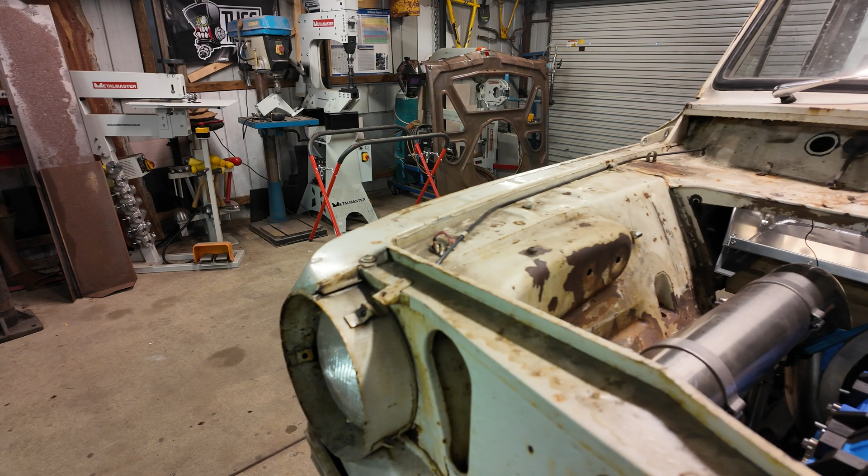That's a hell of a unit. It's also got a 20B, this is a mock-up motor as well guys. It's got a 20B triple rotor being built for it, with what I can only assume is one hell of a hairdryer for it.

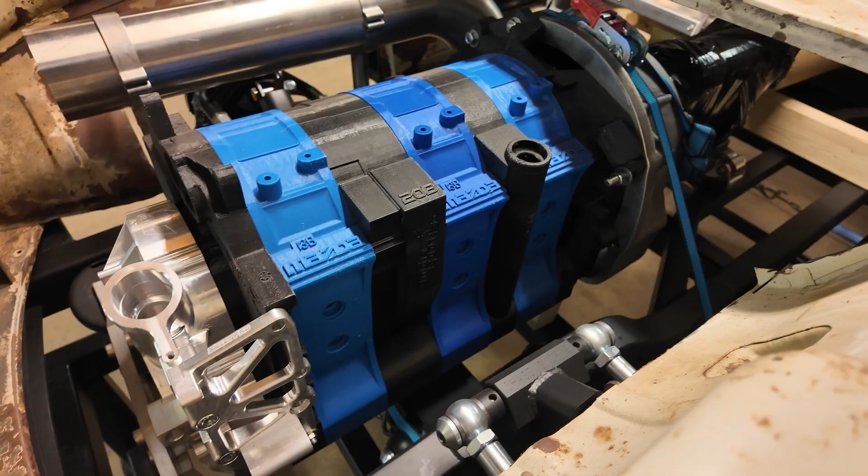But the motor is not quite what we're worrying about at the moment. So we've got our original floor profile roughly, we know roughly where the seat is. Stacey has mocked everything up and got everything in position for the driveline. The only thing we don't have is a steering column, but we're not going to worry about that in this episode. He's still going to mount the rack and a few other bits and pieces before we get to doing that.

So my brain thought initially, I need to create structures and profiles that are rigid and strong, knowing that I need to mount a seat to it. I need it to be self-supporting because I don't want to have it sag and sit on the rails. So what I actually did the other day, it's been bucketing rain here in Canberra, it's the first time it's not rained in a few days.

I actually made up a profile of roughly what this main seat area is going to be. It's very, very basic, it's just a 50mm strip with a couple of folds in it. It gives me the rough layout of where I want everything to be in terms of the main flat sheet profile. What we're going to do now, that I know this size is right, I know roughly how big I need the landing for the seat.

We're going to make it in ram board, we're going to make a cardboard floor first. So we're going to fold it up, cut it to size, draw out all our patterns on it, which should mean we can mirror image our floor.

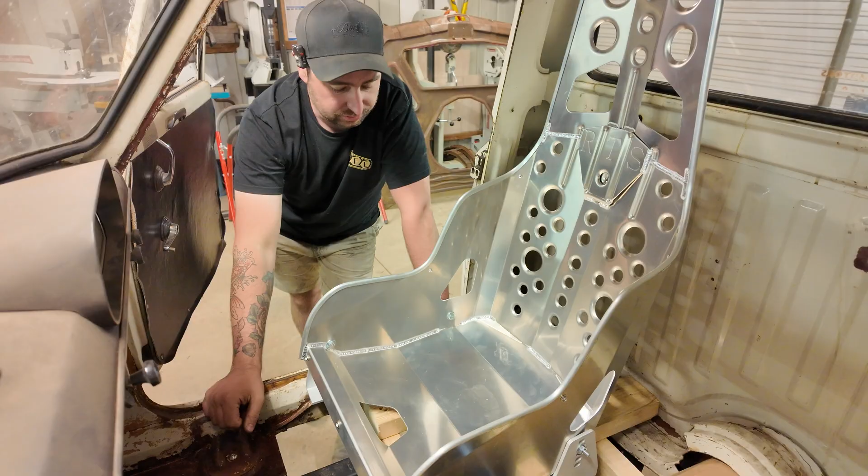What I want to show you before we really kick off: this seat needs to be in this position. It needs to be as close to the pillar as possible, and it needs to have that space behind it for a tube to run through.

What I actually did the other night in the rain was make up this sample profile of how I want the floor to look, knowing that I want the bucket seat to be right there. So I know it needs to be 45mm from the sill over and about 50mm behind, just in case.

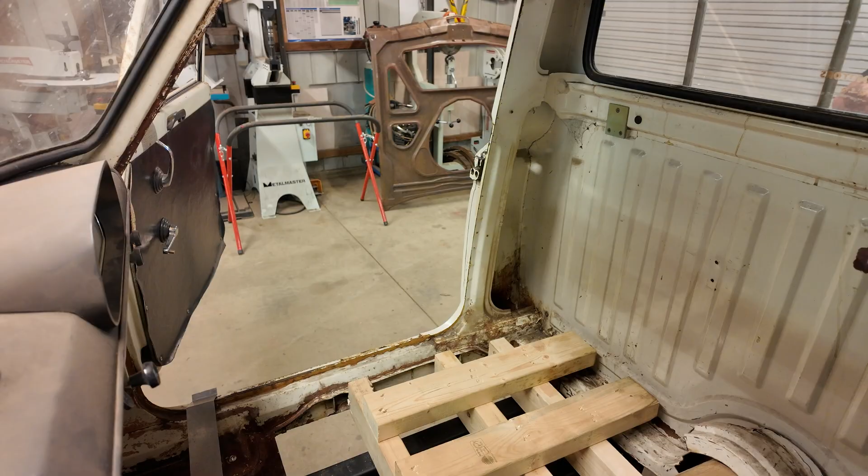So I'm going to pull this out, and the timber comes out just like that. Remember how I was talking about that original floor profile here?

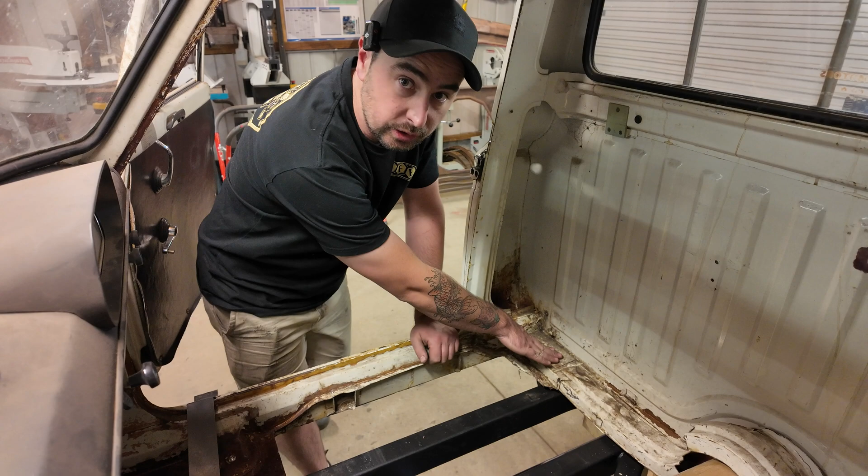Knowing that there's a body mount there and a body mount here, this piece is actually directional. So this is the back, this is the front.

So when it sits in on this floor, it lands where the original body mount floor is, and it lands where this rear top hat originally was. That rear top hat's going to get remade except for where the mounts are, so there'll be a new piece left to right. It'll change across the back of the cab as well.

But this sets the height I need for the floor. It also sets the height for the seat, because the seat actually had to come up just a hair, but that's all good. So with that profile known, I know my cut sizes.

I actually wrote it all down on a piece of paper somewhere. I'm hoping I didn't just throw it away when I tidied up a little, but I know what all this needs to be. These are all 45, so it's fairly simple.

What I'm going to show you now is I'm going to cut the blank in the ram board. I'm going to fold it up so I know roughly the shapes. I then know what this area is, and I can sketch out my design. I can mark out all my patterns on it, and then I can take that pattern and transfer it to my plywood for my hammer form for this area.

So let's actually get the ram board out now, and I'll show you exactly my math behind this. So this is what I've got so far. Normally you'd have footage of me measuring this out and writing all my notes down as well, but because I've already sort of technically done this for the sample, you don't need to see that bit.

So what I did was roughly put the seat in position. I knew how far away it was from the door pinch, and how far away it had to be from the back of the cab, which is good.

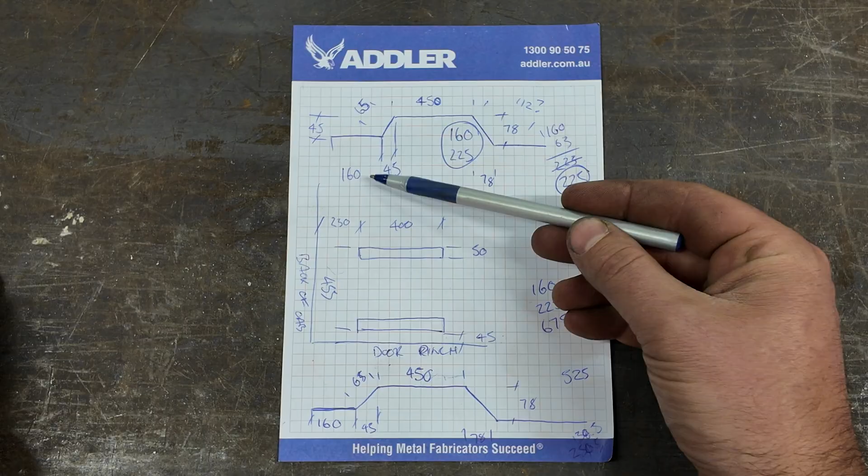It then gave me these sizes, so 160. I know the foot on it is 400 by 50, so I know if I make that landing 450, I should be laughing. Everything should fit.

These seats don't have runners, so they don't slide. They're just bolted and fixed in position. So knowing that, I knew where I needed to set those out.

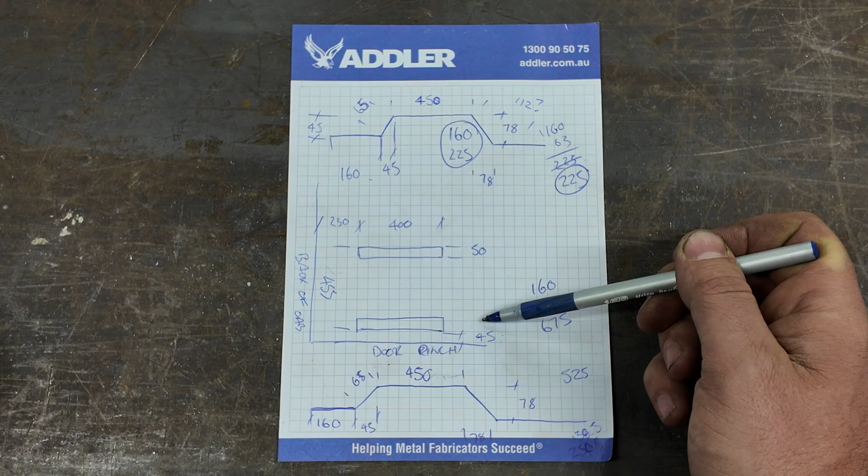I knew the overall spacing of the mounts, which then gave me roughly a position along the sill where I needed to be. I knew roughly how far I wanted that to be. And then obviously there's the footwell, the floor panel section there.

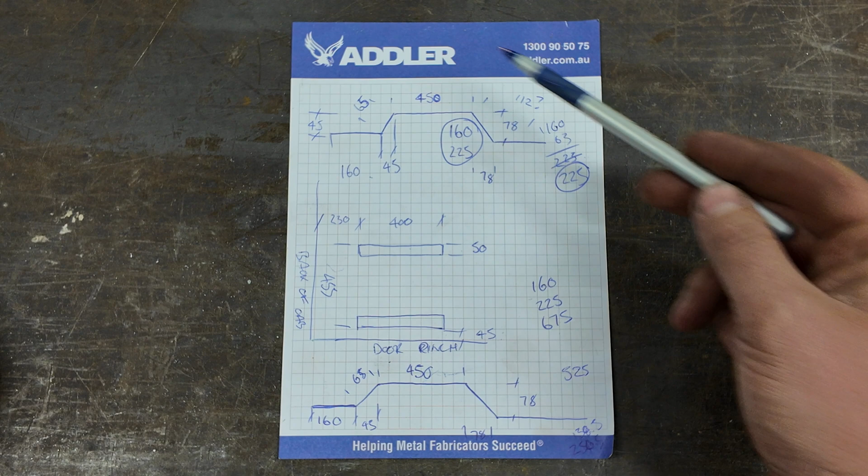Knowing all these dimensions, I then created my fold pattern, which is what's drawn up here, which is where I've got that 160 from and the 225. That 160 is that first fold, 225 is the second fold.

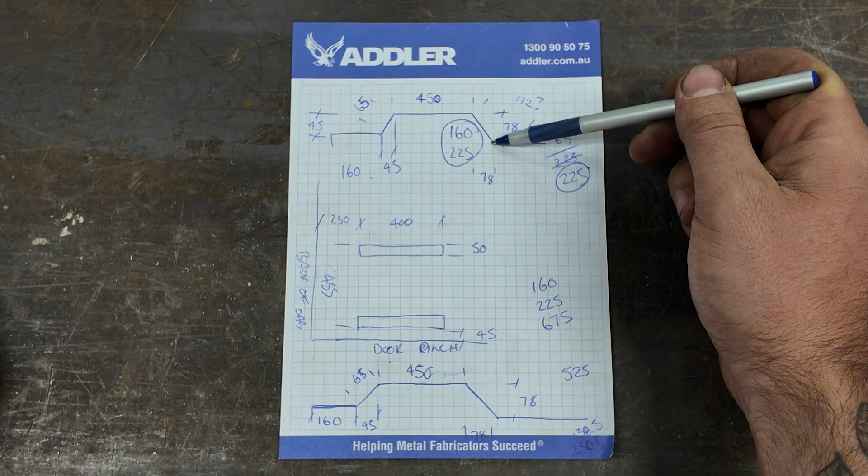I then mark on 450, gives me a point for that one, and then I add 110, not 112, gives me a point for that one, and that's just the overhang of the sheet from there.

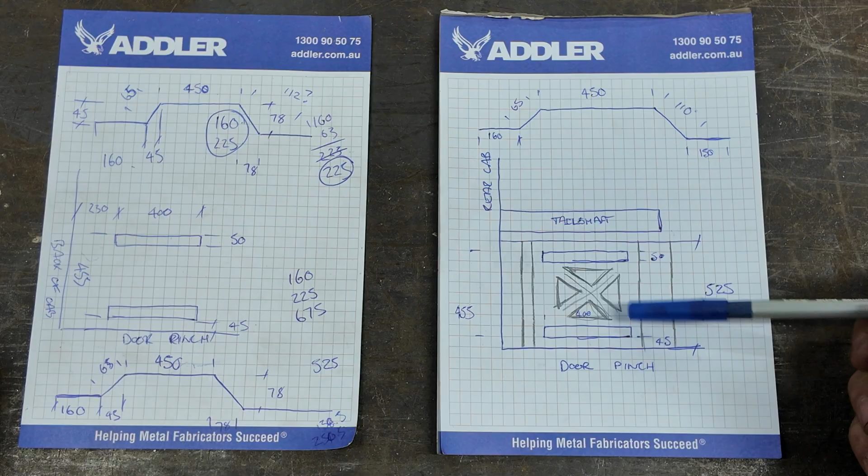Knowing all that, I was able to create my template. What I do after that is a more legitimate plan, so I know exactly where my seat mounts are going to be, what shape I'm doing on the floor. I'll do a bead here later, but that's right on the edge of the sheet so I'm not too concerned about it. I also know where this flat is going to join to the floor footwell piece, added later on.

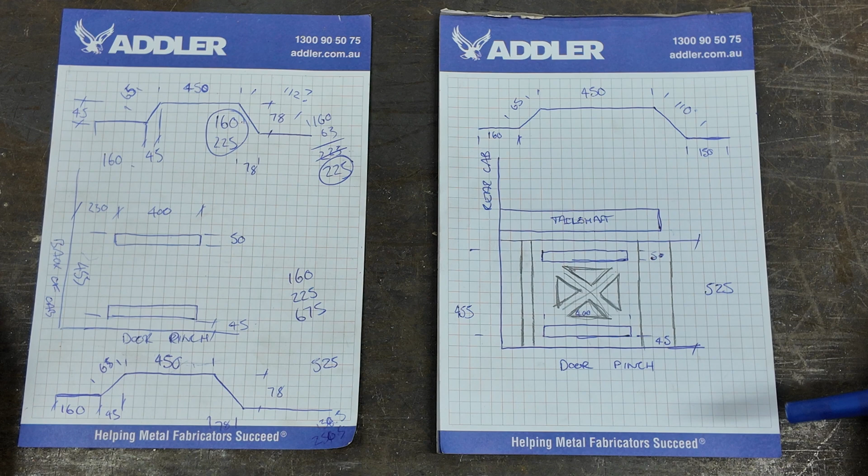I also know I need to make a 2mm or 3mm top hat, which will roughly sit about there, and underneath there'll be an actual triangulated gusset. Those will land and pick up my seat mounts, and the top hat will run through this area.

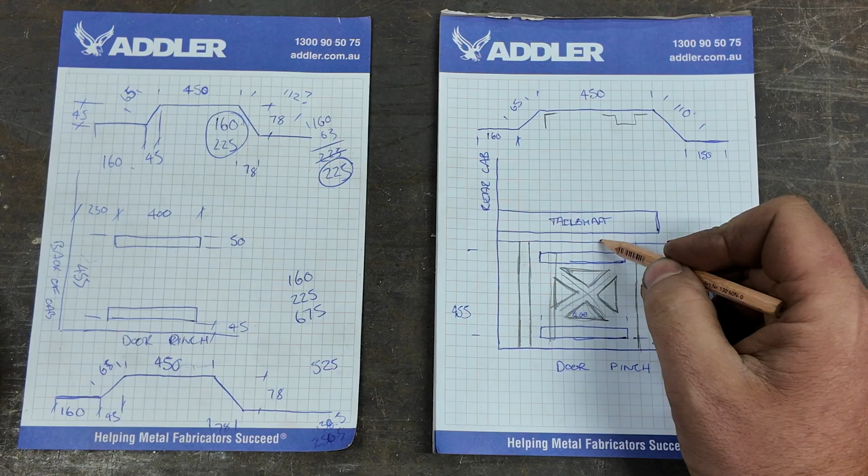So what I'm going to do is write out my fold program, and then we're going to cut this out in Ram Board and get it folded up so we can actually see what we're playing with. Alright, I've got my cardboard cut to size and marked out.

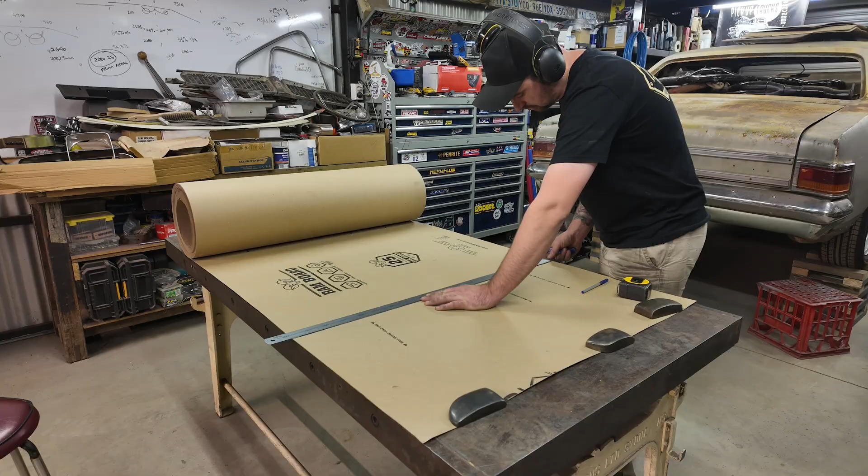That's a fold, not a fold - mismarked, that's a fold. On the other side, fold, fold. Ram Board is pretty good, so you can actually just fold it kind of like you would sheet metal. That's what I'm going to do.

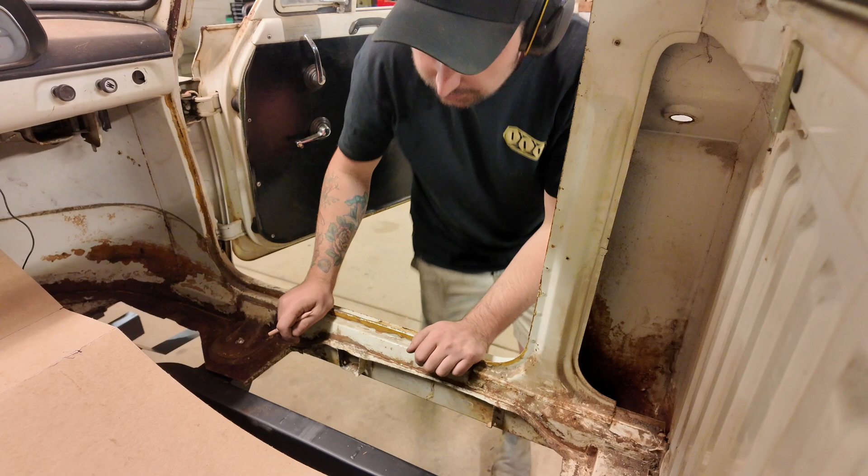Down here at the sill, there's actually like a 75-degree fold or thereabouts. It comes off this edge, folds down, and meets up where the original floor was. Later on I'm going to sand all this flat so this inner sill is flat and just looks decorative. What I want my pan to do is sit on this edge and then follow down into these areas.

I'll put a flange, plug welded through there and through here roughly, so it's stiff. So what I need to do is lose my pencil, but I need to measure the offset of that fold, because this cardboard floor pan we've got needs to know where it needs to be cut so it can fit in better.

So I'm going to grab a couple of rulers right now, just so I can measure this offset.

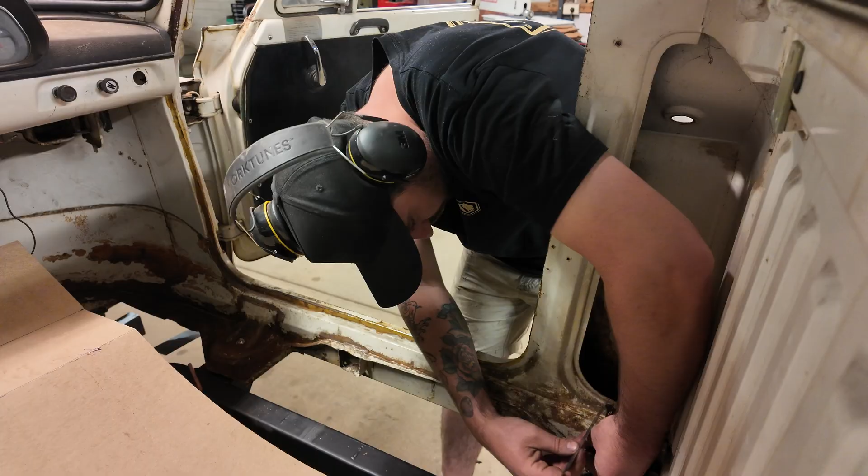I know I want it to finish up hard on that edge later on, and I know I need to cut it back to there. So to there I've got 32 mil. Let's double check down the back here as well, just to be sure - get my fat hands out of the way - 32 as well. Alright, cool.

So once that sits in here, that 32 needs to come off this point out to this point, so it's 32 mil in from here. It's going to be a bit of a funny cut. But it's actually got to be slightly less - only that amount - because it's going to land on here.

So it's actually going to be flat down first, so I need to measure that and then take that off. That small amount there is only 15, and 17, which gives us our 32, which is what we need.

So put a note here: 15 on that edge, and then from there it's 32 back, 32 back, and again it's going to be like a funny sort of diagonal notch down here.

This one is only going to go - so that comes down. We also need to know how far down it's going to go, which is getting tricky. We're talking compound miters here. So we know that sits up there. These are obviously not quite 45 degrees, they're floppy, that's fine - we know what they've got to be later on.

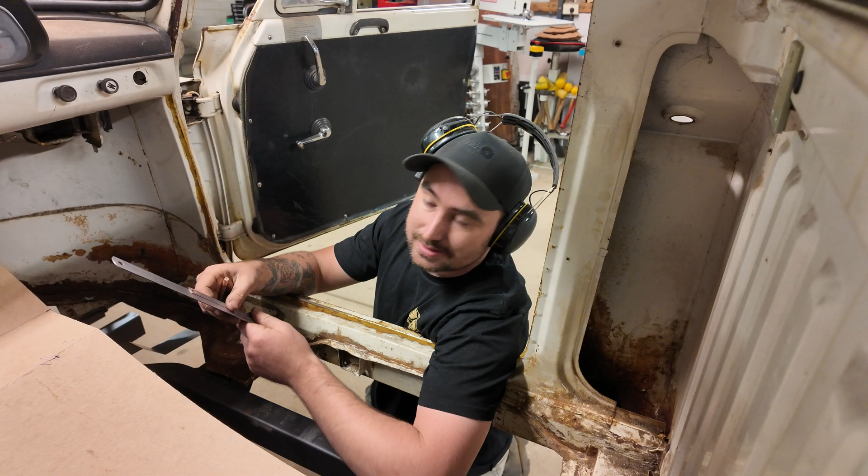So I've got to cut back off that. I need to measure what the height of this area is, which is easier said than done, but I might use a small ruler this time. Hold that small ruler against that edge to the corner - that's 30 mil down.

I need to come from this edge, 30 down. All right, I hope you followed all those notes. I'm now going to trim up.

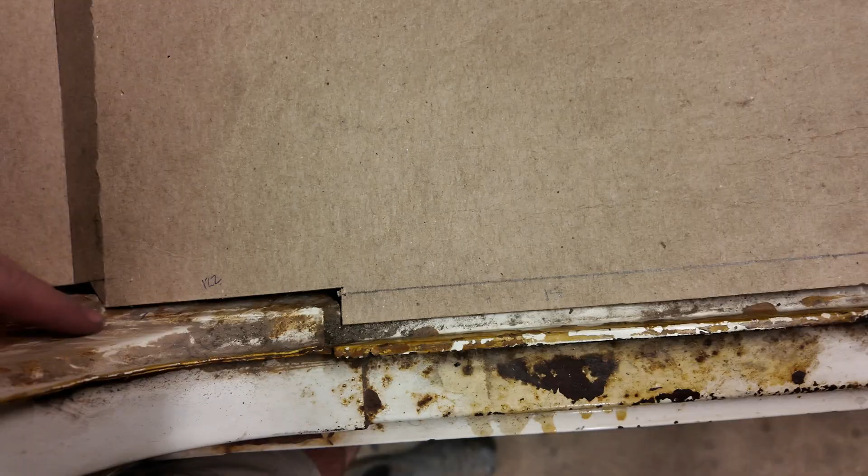I'm going to mark that out, trim it out, bring it back here, and it should just fall in place, roughly. Probably not. So you saw me make a few little adjustments in the trim, just because there's an extra layer of sheet metal on this pillar. Remember, it doesn't sit fully flat down because of that body mount and stuff, but it's about there is where it's got to sit.

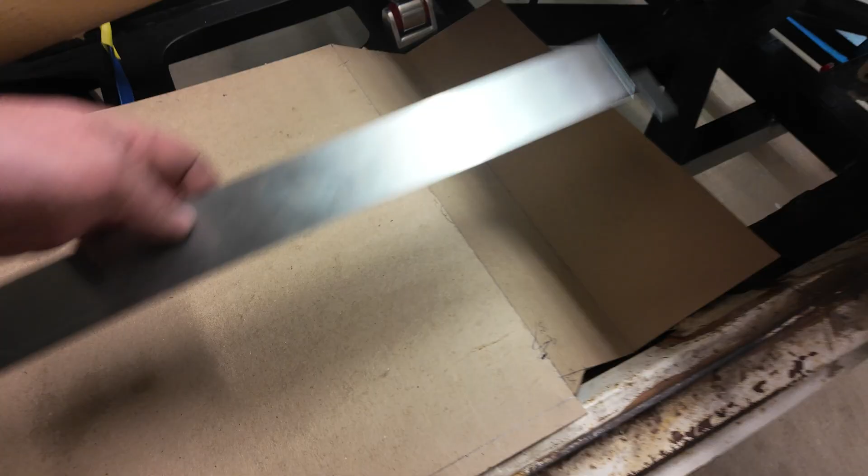Now before I commit to this profile in that metal, I will double check everything, make sure it is sweet before I go and notch out the floor, because I only really want to notch it once. The other thing I still need to do is the mark out for where that is.

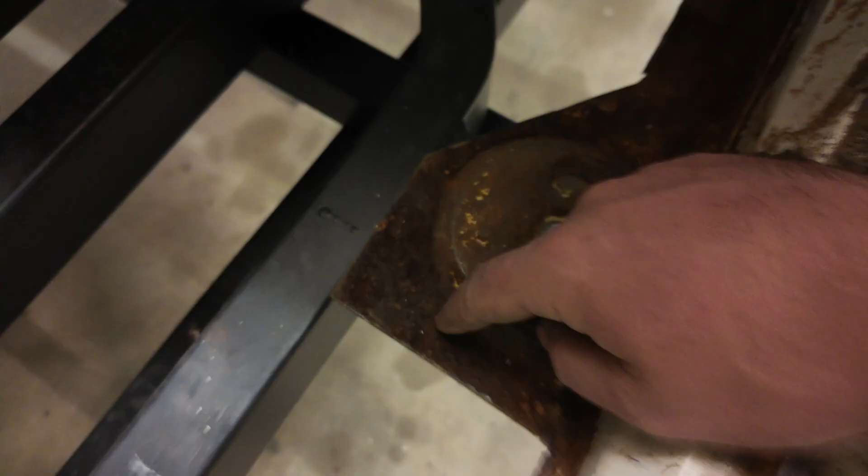In a perfect world, what I would like to do, what I'll probably work out in a minute, so I'll throw that on the floor. It might be a bit hard to see, but I know you can see it on the camera. This bottom edge goes around that body mount.

I'm actually going to cut the old floor off, the structural piece, and I'm going to butt weld it right into that corner so you'll never see it. It'll look like it was always there. So yes, I'm going to work out that notch next.

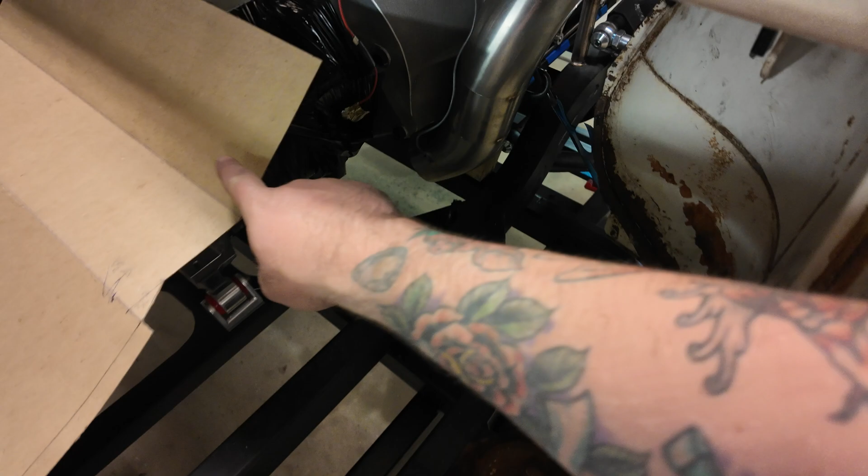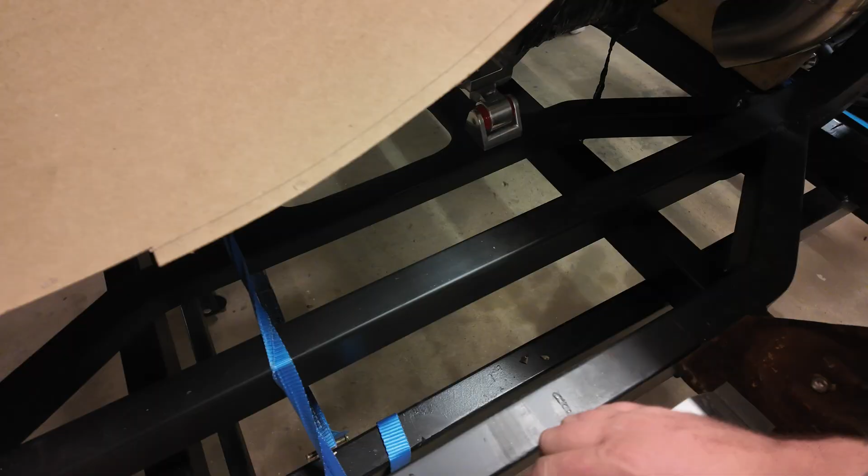I know that bottom corner sat hard in there. We can get the sample back. Actually, it sat back a little bit. Now I'm thinking about it, once that sits in there, no, it sits back a little bit. It sits back 20 mil or so.

But that's fine, because I can just make a quick template of that. I know I've got to be 20 back from that edge, square, and I'm laughing.

I've actually made a few more cardboard templates of the floor, a few more samples. Finally got it right. There was a couple of little adjustments I needed to make because of where the seat position was. So I finally got my cardboard template where I want it, which looks like this.

I actually had to put 25 mil in this back area to bring this whole platform forward, change this front fold so it was quite steeper. Obviously notches around where that body mount is.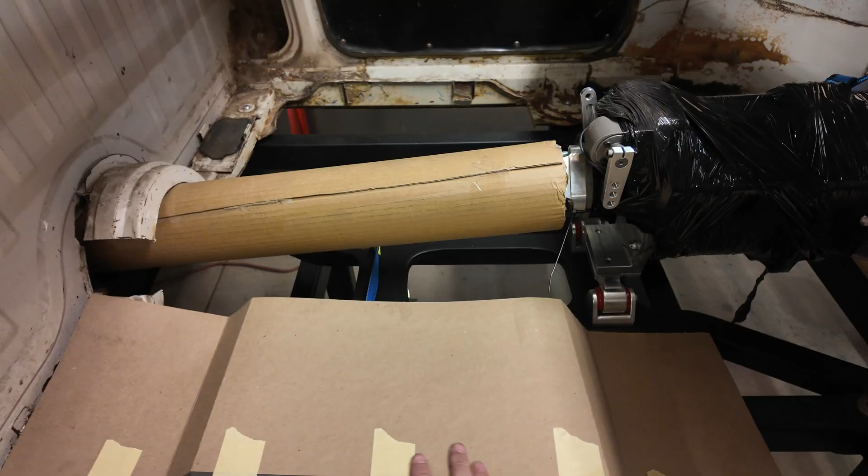So now I know where this sits. I have mocked the seat up just sitting in there because obviously this is cardboard and don't need it to fall through. So I know where I need it to land, which is 25 mil from each edge.

Now that I'm happy with that, I'm going to pull it out and I'm going to start the layout for all the design on this section. Looking at this being longer now, I'm going to do something different in here. I want to put some shapes in here. Probably going to leave that for the meantime, but let's get it out and start sketching out.

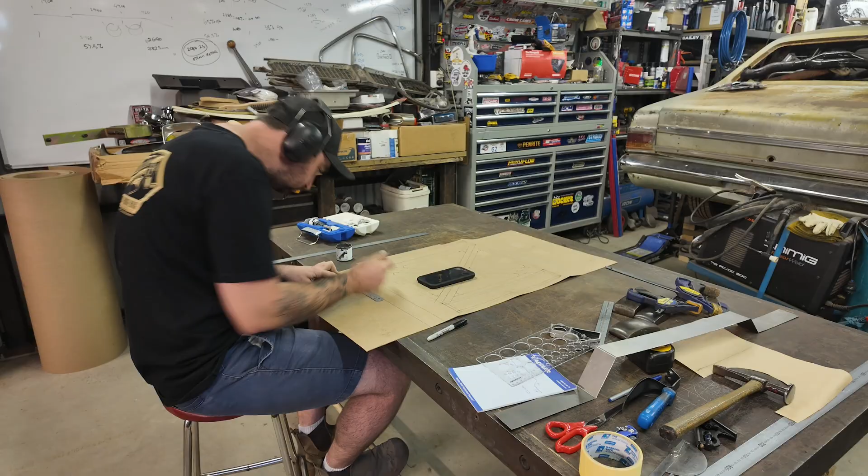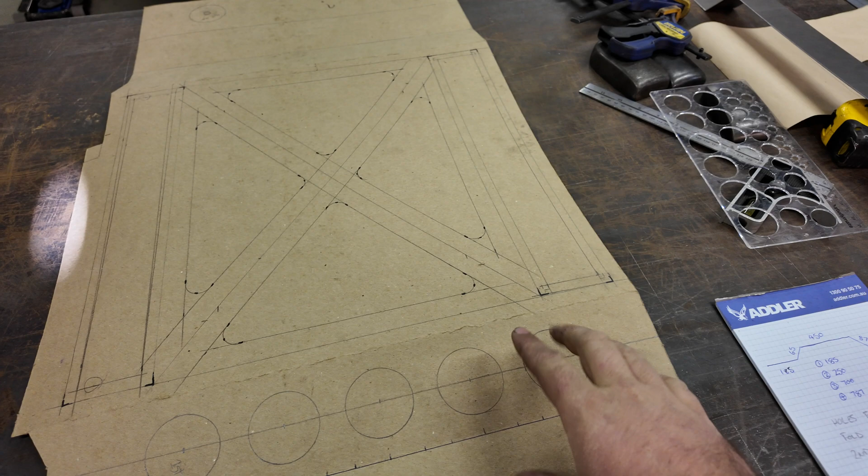All right, so what I've got is these areas are for the seat mounts to land on, and this is all just strength in here. Just going to be all raised, just to, well, I might actually sink that, raise those, so that area is nice and strong. They're not going to be dimple dies, they're just going to be pressed circles, again, just for strength. I'm not 100% sure what I want to do back here.

This is where it butts into the firewall. I do want to put some sort of ribbing there, just not sure what I want to do yet, but that area being quite large and flat, I can do that later on.

I need to put a hole saw here just to clear the body mount. Obviously all my notches are there. And the seat mounts are actually splayed a little bit, so I'll have to mark a center line and then mark them out evenly when I do my timber form.

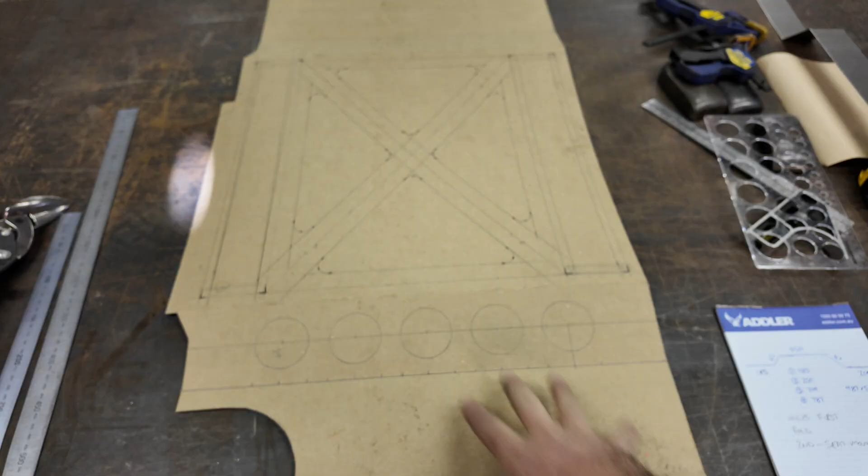So what I'm going to do now is I'm actually going to cut this one out first, and then I'll cut the blank floor pan. I won't do any of the notches in it or anything. I'll just put a center line up it and I'll do everything off that. Obviously mark out my folds so I know everything lays out. I do have a bit of a process I need to follow.

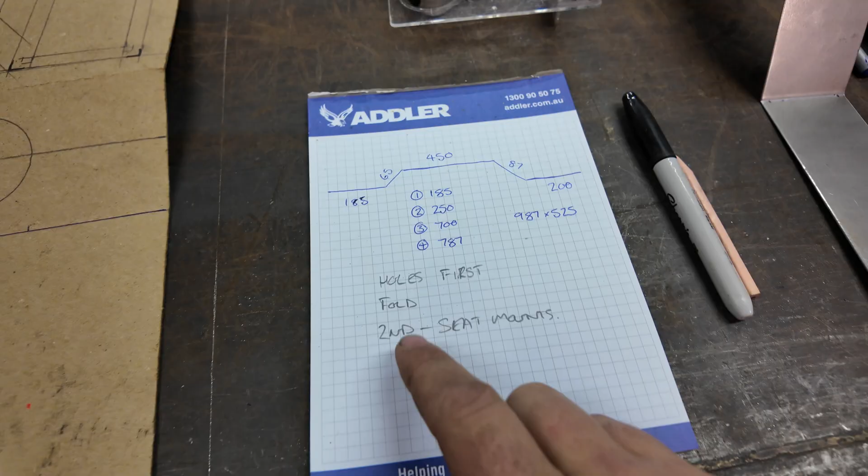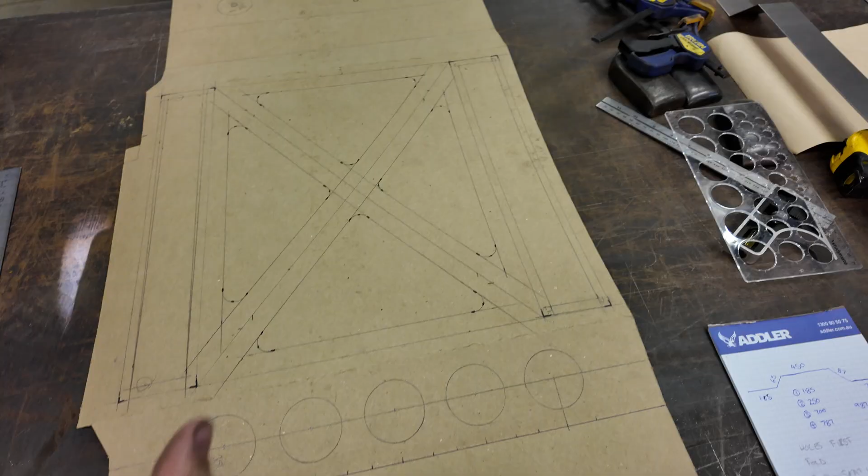I need to do these holes first while it's still flat, leaving all these notches for later so there's extra meat on there. Then I can fold the pan up. I can sit my timber hammer forms inside the folded section, because all this is upside down, so this area is up out of the way, and I can do all this stuff afterwards.

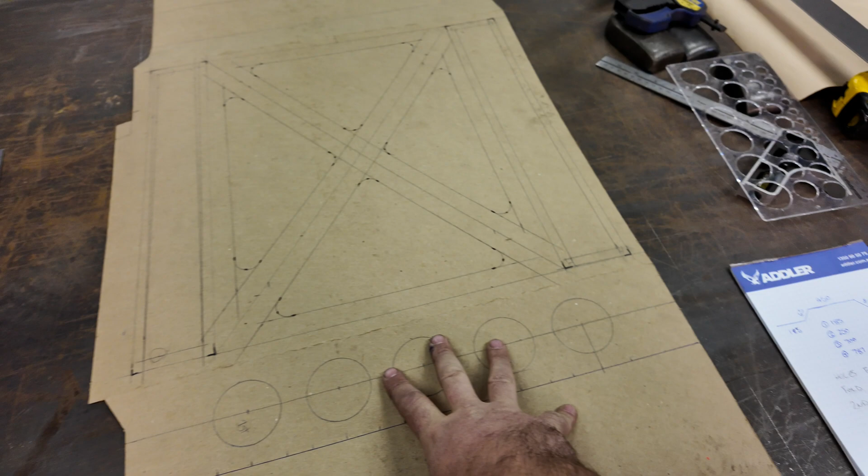But if I want to sink that, I actually need to do it before it gets folded, because this will all get in the way. I'll have to keep that in mind. I might have to do those and those first, then fold it, and then do my raised seat mounts. Or do I just do those raised?

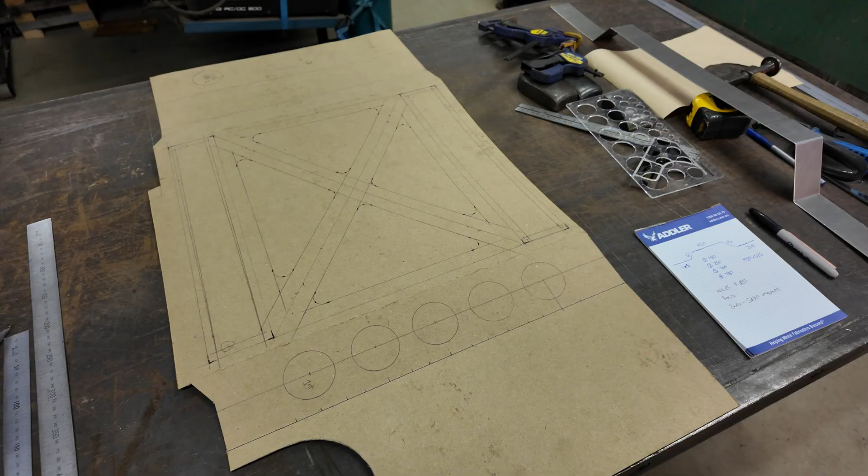No, that'd look cool if those were sunk. I'm going to sink those ones, and raise the seat mounts. All right, let's cut some timber.

You did just see me start with the jigsaw. The problem I was having was the blade was actually flexing, cutting through two pieces, and it was already starting to run off. It would have cut really badly or really skewed. So I've gone and grabbed my father's circular saw. I really need to buy one of those myself.

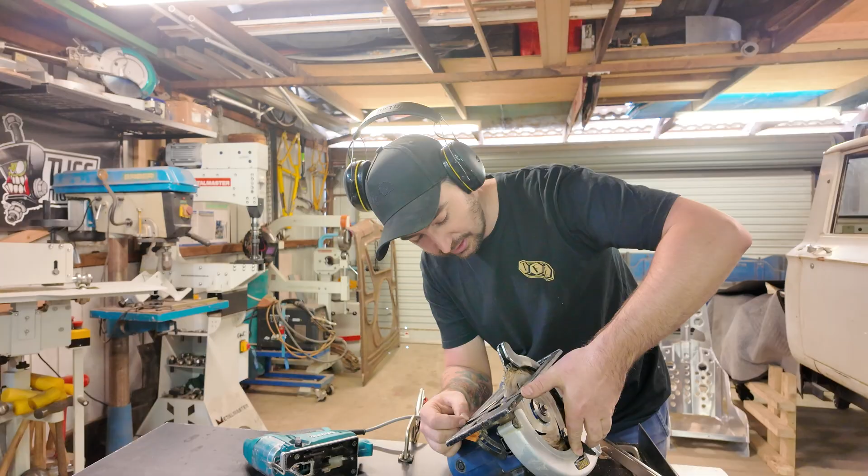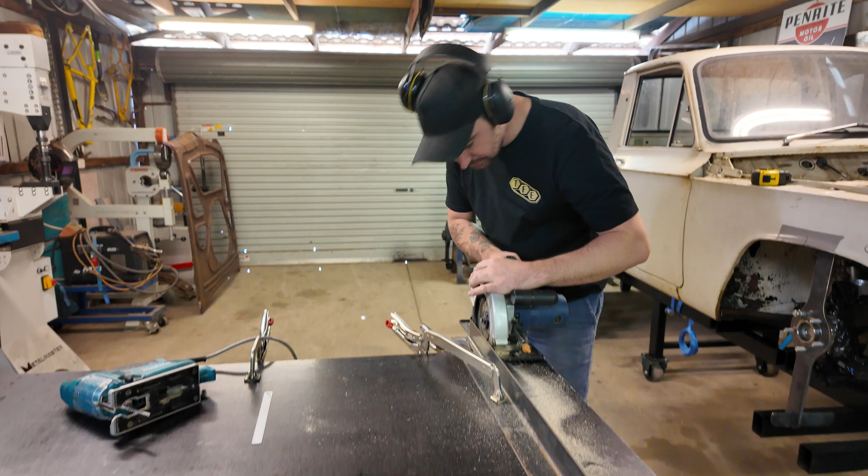All I'm doing with this is using it as a guide, and it's actually got the same offset. No freaking way, is that for real? I don't believe it, but it does. That's considerably lucky. So I'll just cut this off here. Sound like a plan?

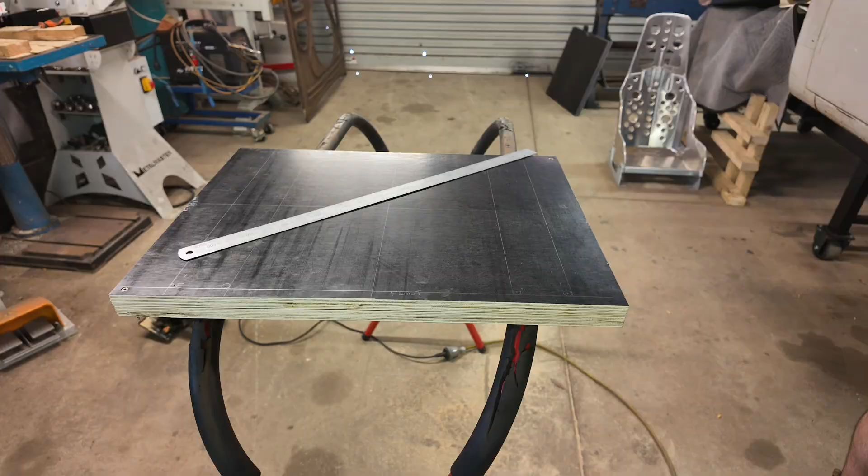All right, so what I've just done with my board is hole-sawed all my holes for my corners - that's where we're going to turn around, the tight corners as well. I've now set this angle up. I measured from the cutting edge - the router has a square edge on this side.

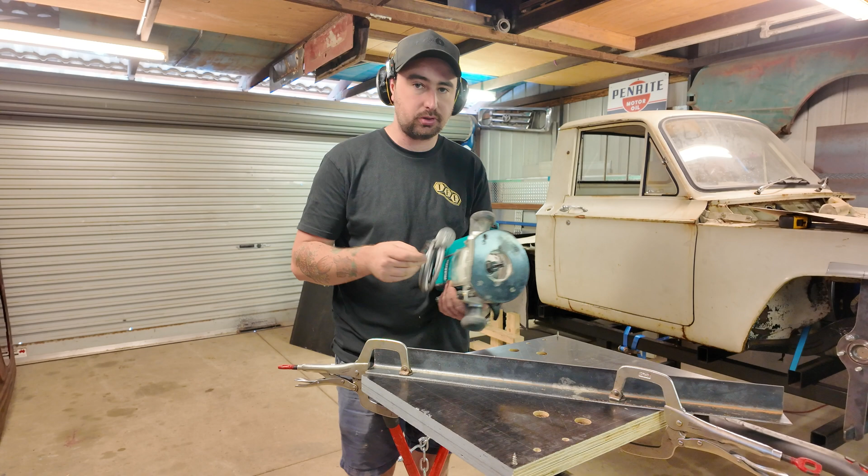I've just gone and got a 1/2 inch bit. There's a flat edge on this side, and I've set up an angle. It's 64 mil, so to the line I want to cut on, I've just measured 64 from that inside edge. Basically what I'll do is sit the router in the hole, butt up to it, and then just off I go.

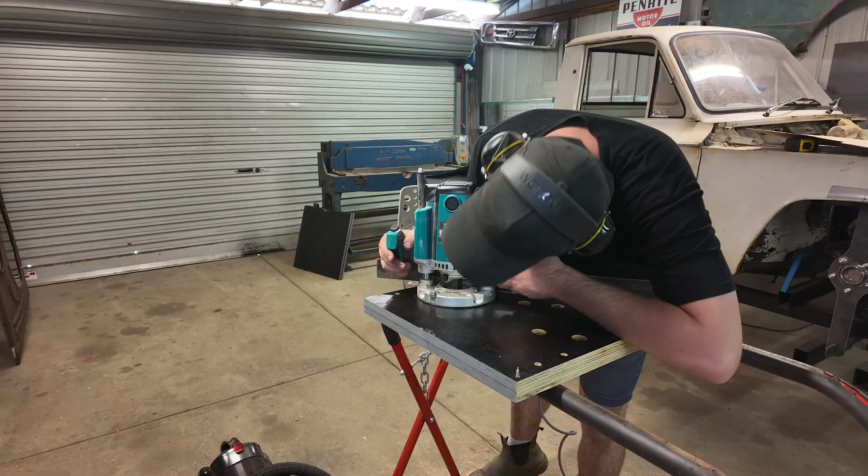So there's not much else to talk about apart from that, because it's just how it's going to be. I'm going to chop all this out now - it's probably going to take an hour or so, because I want to do it really neat.

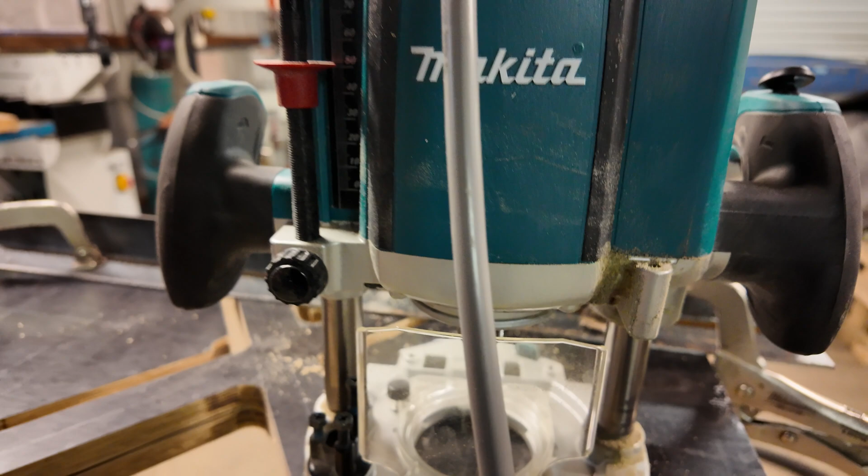Cut to time lapse again. So I had to stop because I made the bit 2-piece. Oops.

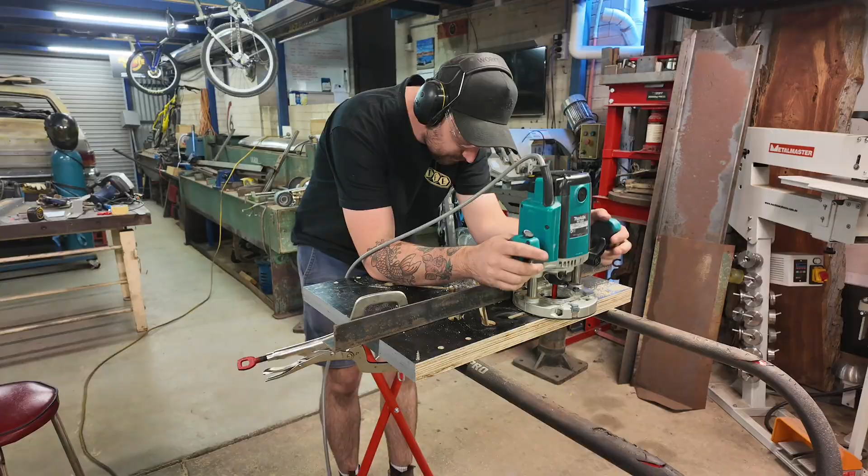So I've just had to run out to the tool shop. Where is it? Put it on the camera. We haven't got one with a 1/2 inch shank. So let's put that back in and keep going.

All right, so I have made up both our hammer forms. I've just given everything a quick tidy up because that was really messy. I've also gone and cut the blank.

Now I have marked out my folds on it already, and marked out my center line for where we're going to do these holes first. The reason we're doing the holes first is because once they're in, they're too close to the edge, and when I go to fold it, I'll crush them, and I don't want to do that. So we'll do these holes first, fold it up, and then do all our beads.

Actually, we're going to do holes first - these inner ones, because I think they clear. Then we're going to fold it up, and then do the outer ones. Fold up these ones while it's all flat, flip it over because they're too close. Yeah, that's the process I'm going to do.

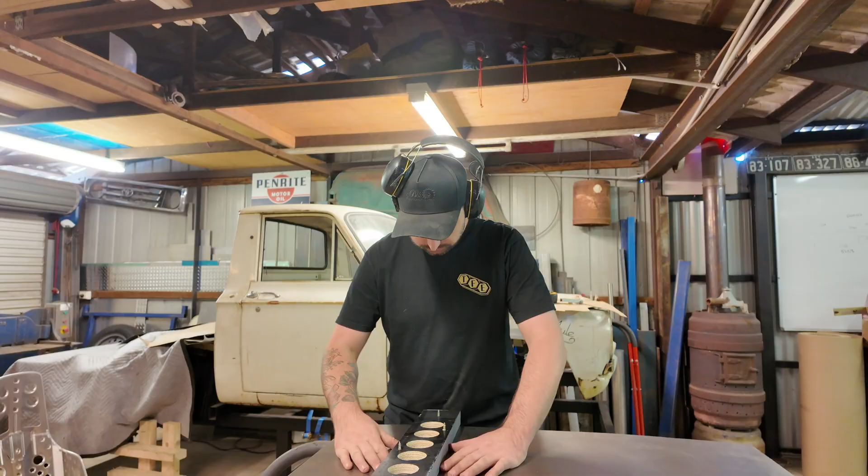So I've marked out a center line for where I want our circles, and all I've got to do is put that center line in. I've actually just got to mark the center of that first one because it's slightly offset to one side to the tunnel side, so it's centered when it's in the car. But you guys knew that already because you've been watching and paying attention.

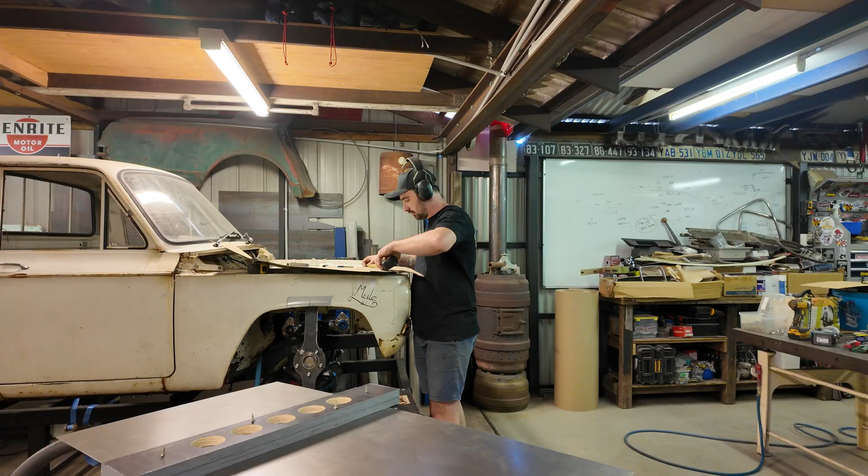So the center of that one is 245. 245 is there.

Now, if I remember correctly, I cut that blank at 100. I did. So I should be able to mark out 50 mil away.

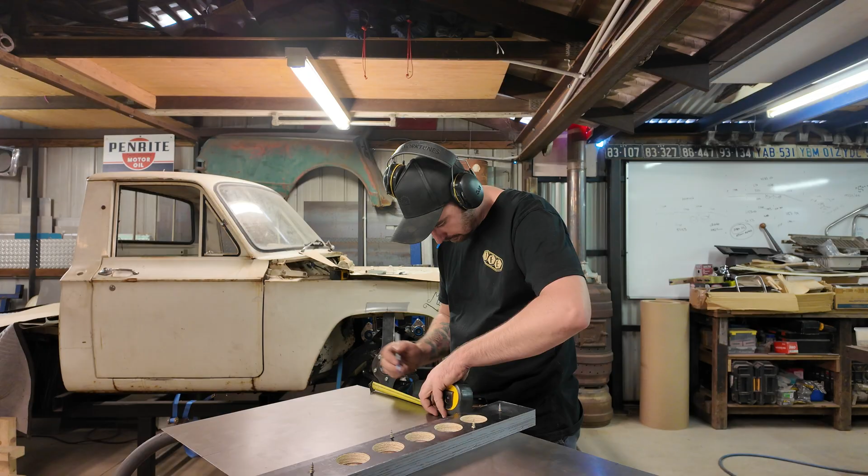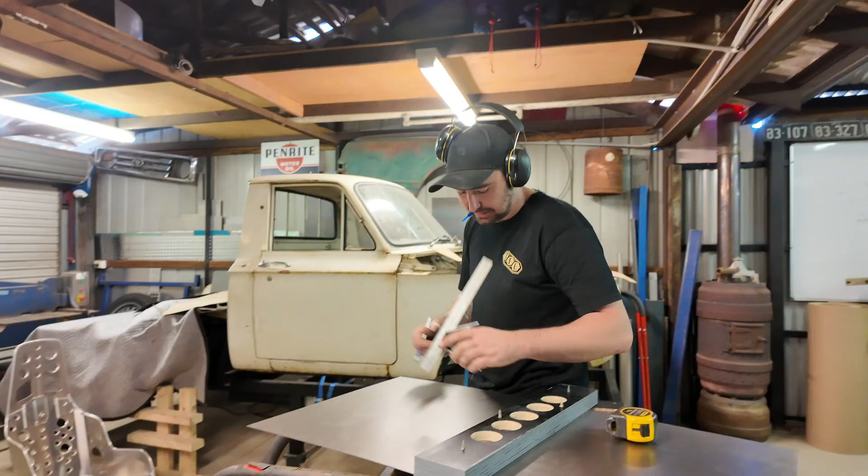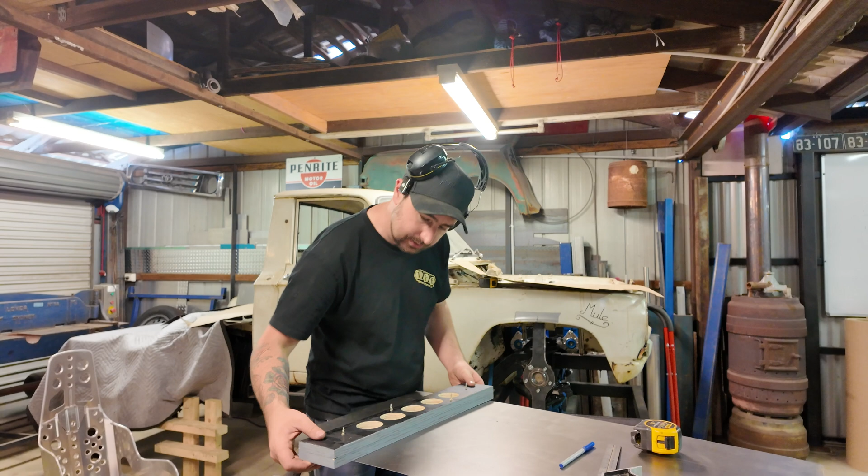And up here, square that off. And these will be clamping lines just so we get this in the right spot. And that sits right about there. Pretty lined up.

I'd be pretty happy with that. So I'm going to take those apart, mark and drill the holes. See you back here in a minute.

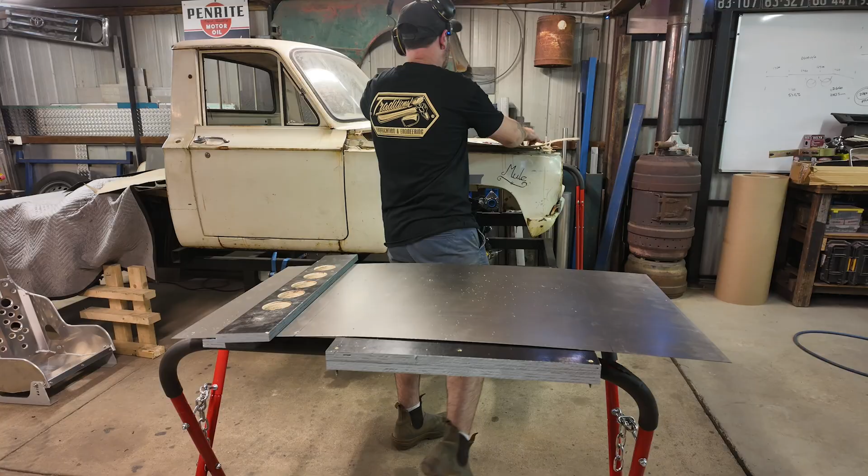Time lapse. Now, like we've done with previous hammer forms, lower plates in. I'm just going to tighten it all up in a minute, work out my heights and stuff.

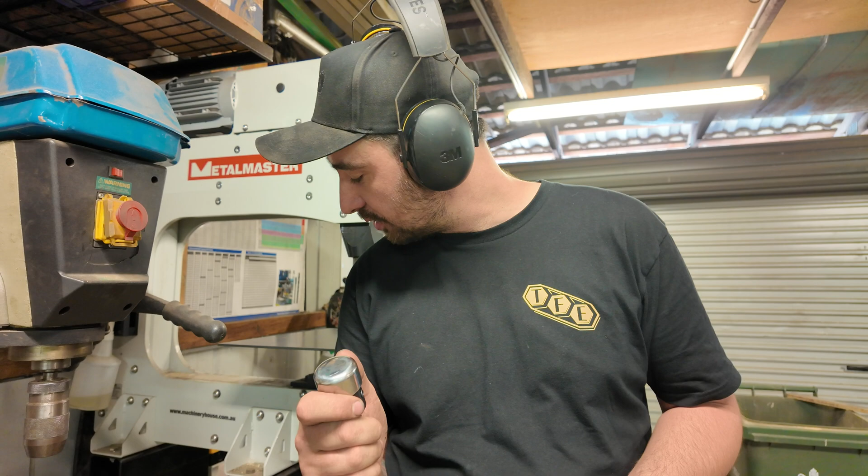My other thought was I could use my 36-inch or my flat upper, because that has quite a radius on it too. I might use the flat upper because it's flat and I want these holes flat. I might use that because I can sit it into the hole and it can just travel around on the inside edge. So it should work. In theory, it should work. I'm just going to give it a go either way. Find out in a minute.

All right, I'm all set up. I had no idea if this is going to work, but I'm going to try it anyway.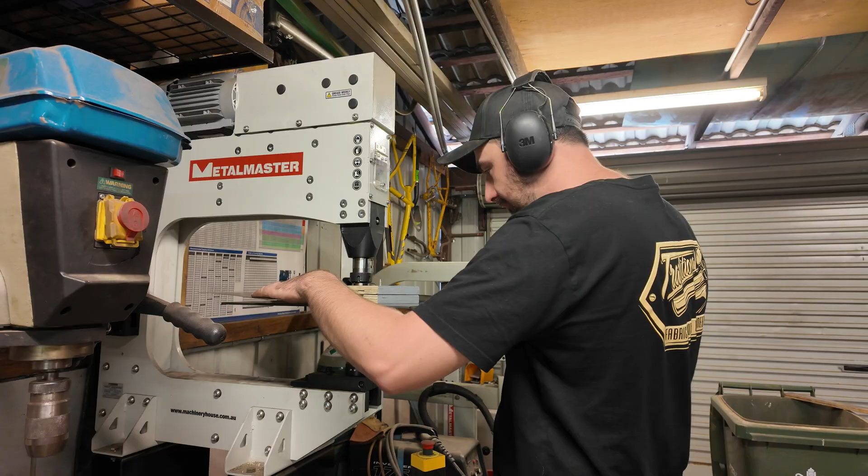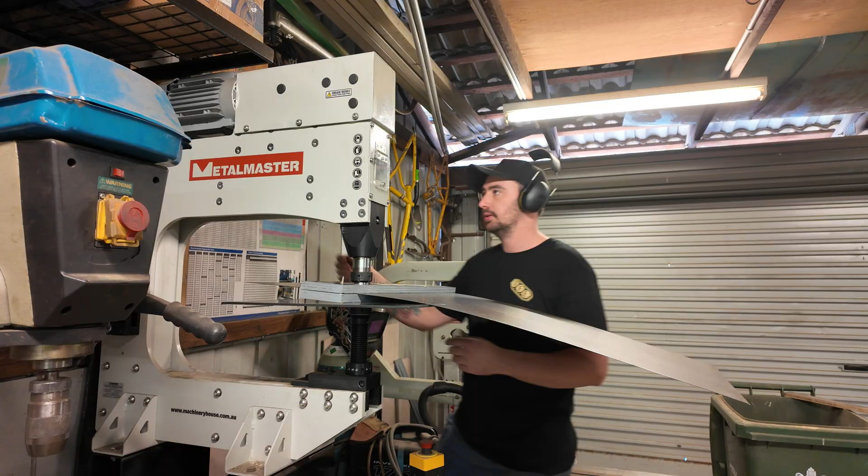I mean, it's starting to do what I would want it to do. Raise that all the way to the top of the stroke, which is there. Bring my bed up a bit more.

Let's see what happens next, I suppose. Ooh, too tight. Okay. Might also be too much surface area, which I was kind of thinking might happen. Because, you know, I'm trying to push a 40mm tool into a 50mm, 54mm hole. Back it off a bit.

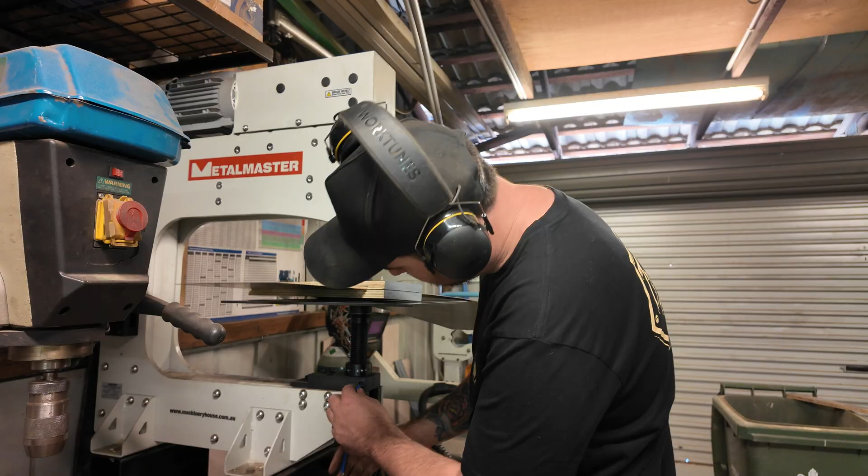It's definitely making a dimple. It's definitely looking nice. So we'll...

Now the problem I'm having now is the collet's getting caught up on the hammer form. That's why I was thinking I might use my 36 lower because I've got a bit more space on the tool holder. So this is definitely working. I just need to change my tooling again.

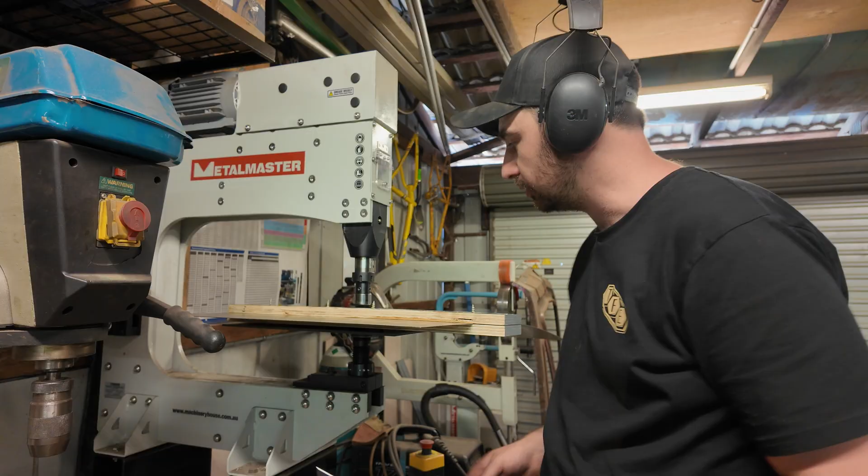Alright, so I've swapped the tooling, got the 36 in the lower. I went up 5 full turns, which works out to whatever it was. If I measure the depth in one of the holes we haven't done, it measures at 17 and a little bit, which is about the thickness of the timber.

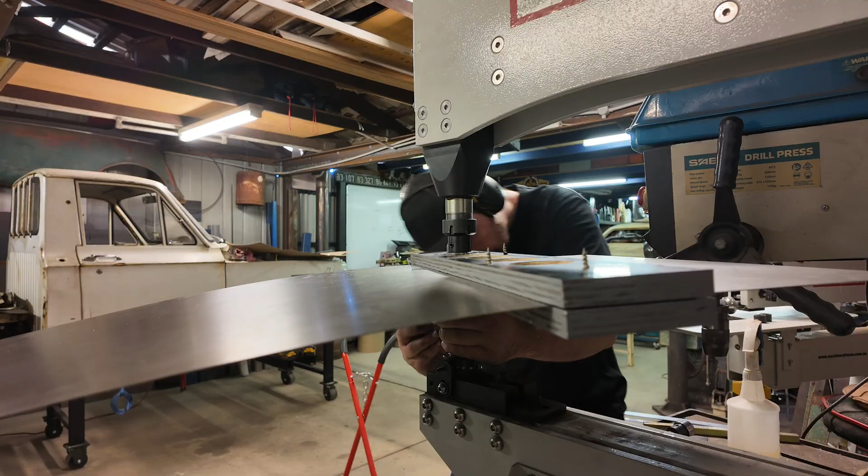If I measure the one we have done, we've got 23, so we're at 5mm deep right now. I would like to get those a little deeper. I don't know how much I'm going to get. I'm going to try for another 3mm, try and get them to 8mm deep so they're really there.

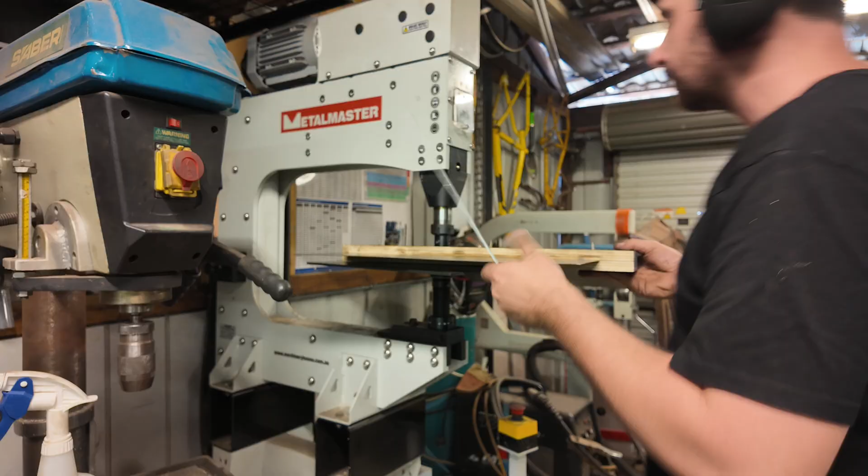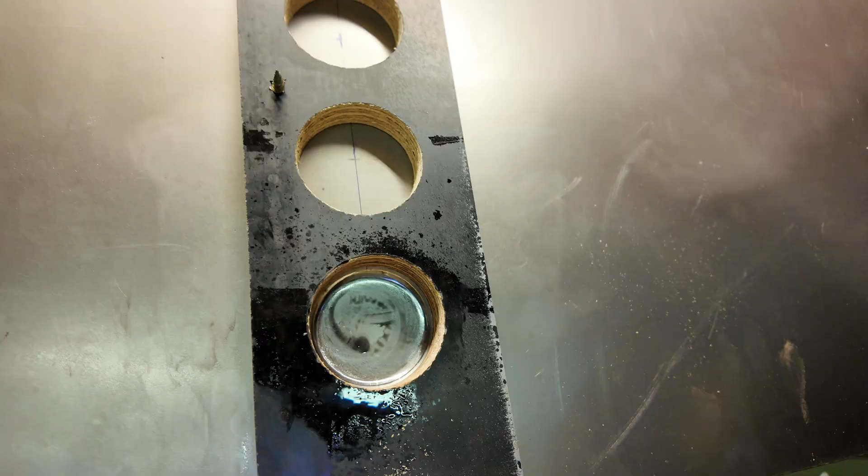So yeah, it is working. Pull this out, I can actually show you. You can see there is definitely a raised section there, which is good.

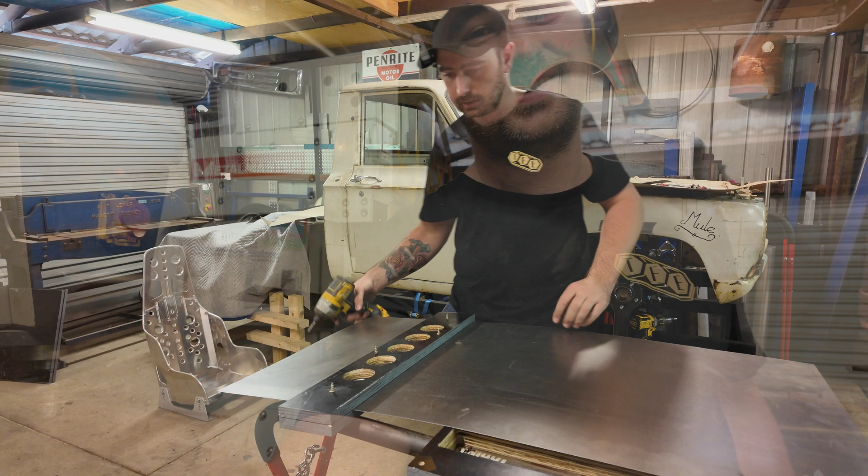So yes, tooling up, let's go again. That is our circles pressed. I'm just going to undo these and we'll take a squiz at them. They're all roughly around the same depth, so that 5 to 6 mil.

They look cool. That's the backside. That's all they need to be. Nice soft radius on them. Or on the ground there, that'll do. Ooh, they look cool. That's cool.

Alright, next up, the bigger part.